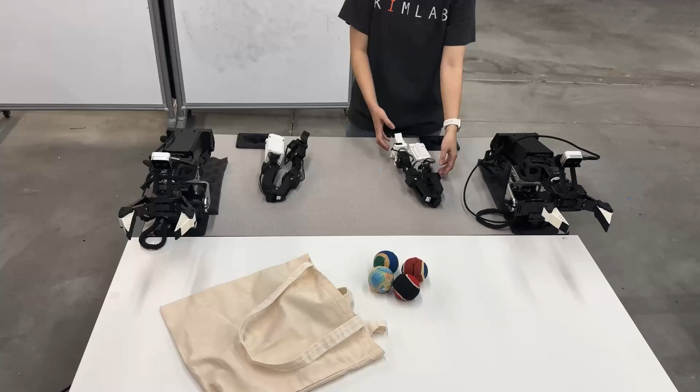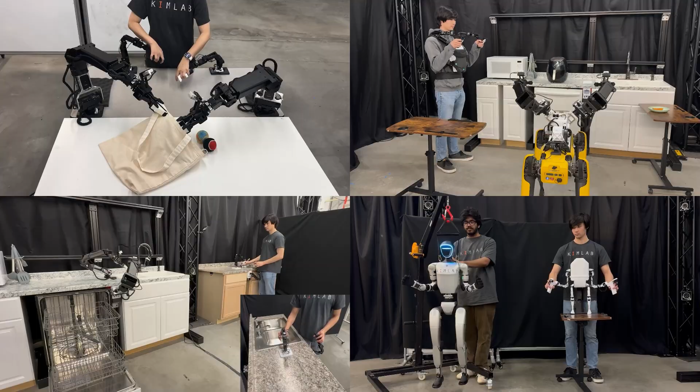We present PAPRLE, a modular ecosystem for robotic limbs. With PAPRLE, users can flexibly arrange diverse leader-follower setups and control various configurations through a unified teleoperation framework. By supporting a wide range of follower configurations and leader devices, PAPRLE provides a flexible and scalable solution for large-scale data collection.

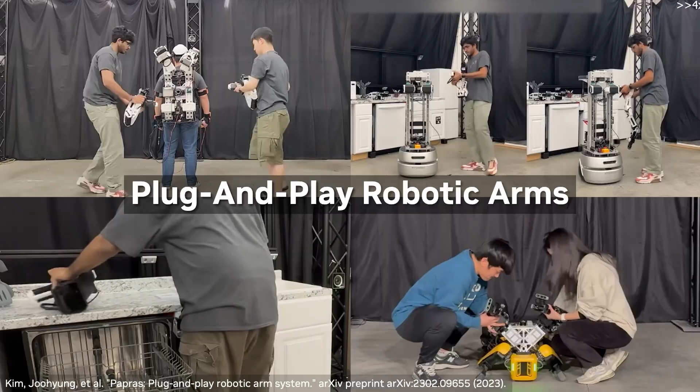In our prior work, we introduced PAPRAS, the plug-and-play robotic arm system. PAPRAS enables flexible hardware configurations by allowing robotic arms to be mounted in various places, enabling varied use cases.

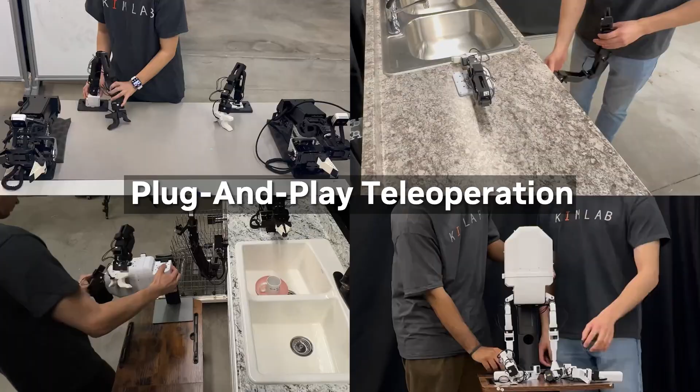Building on this plug-and-play concept, PAPRLE extends this idea to the teleoperation domain. We developed pluggable puppeteer devices that can be freely mounted to the system, as many as needed. This modular design allows users to teleoperate diverse multi-limb configurations of PAPRAS arms with ease.

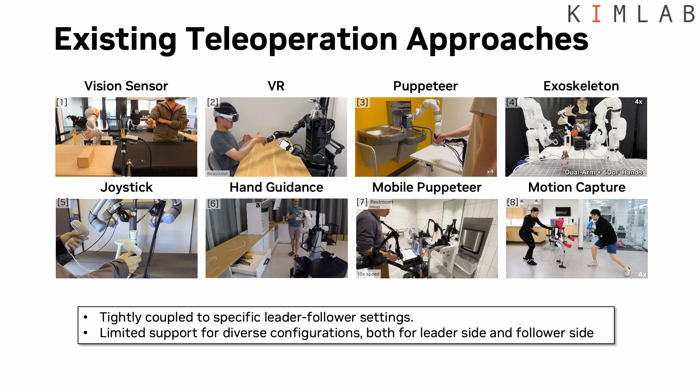As robot learning increasingly depends on large-scale datasets, teleoperation has become a critical tool for data collection. While many existing works have made significant progress in teleoperation, they are often tightly coupled to specific hardware setups. This makes it challenging to support broader diversity on both the leader and follower side.

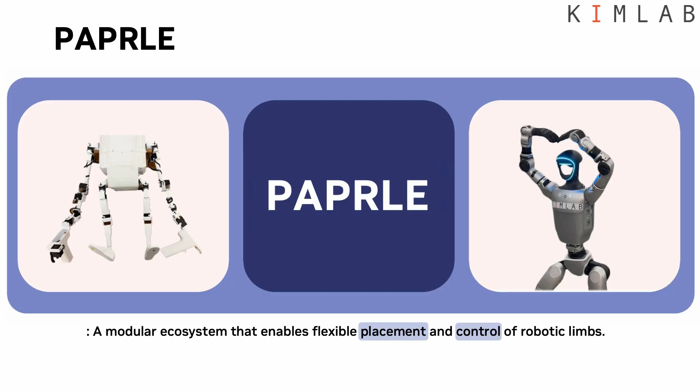In contrast, PAPRLE is not limited to specific leader devices or follower robots. Users can plug in the leader device of their choice and pair it with the desired follower robot.

Here are examples of diverse configurations using a pair of PAPRAS arms. They can be mounted on a table for tabletop tasks, on top of a counter or wall for extended workspace, or on a mobile platform for mobile manipulation tasks.

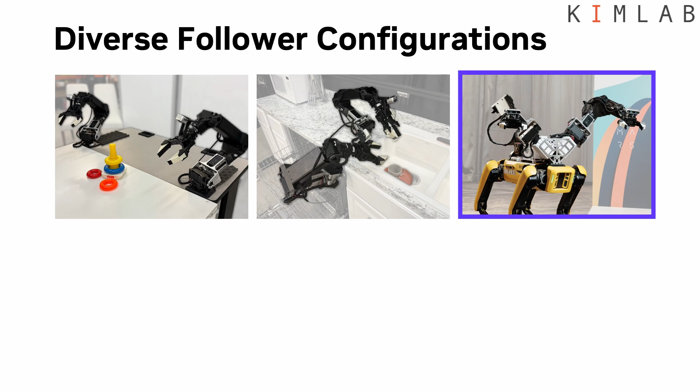Leader configurations for these setups can be easily arranged using our pluggable puppeteer devices, which can also be mounted in various positions to match the follower configuration.

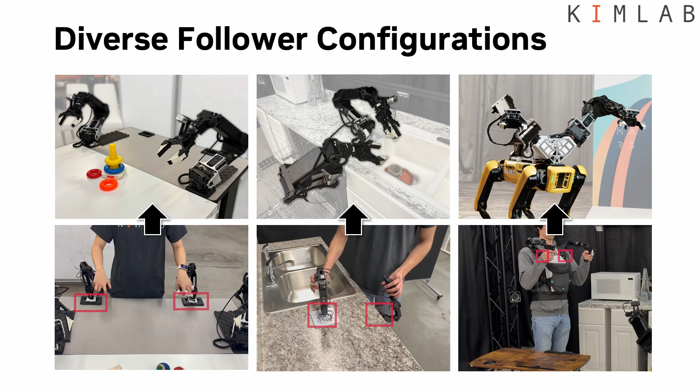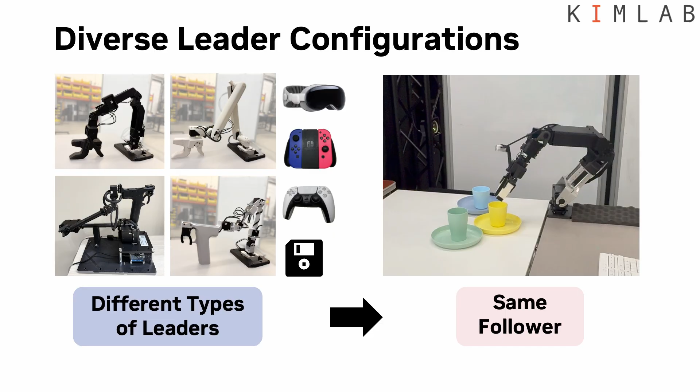This is the overview of the PAPRLE teleoperation system. The system is modularized with 4 modules, allowing users to plug and play leader and follower components as needed. PAPRLE supports both task space and joint space control, enabling teleoperation between heterogeneous setups.

For example, a puppeteer with a UR5-like structure can control a PAPRLE arm with a very different kinematic structure. The signals from the leader are translated into joint position commands and forwarded to the follower robot.

PAPRLE is compatible with a wide range of environments. For hardware, both ROS1 and ROS2 are supported, and for simulation, MuJoCo, IsaacGym, and Gazebo are supported.

For puppeteer devices, PAPRLE provides force feedback to the leader, enhancing user awareness even when the leader and the follower have different joint configurations.

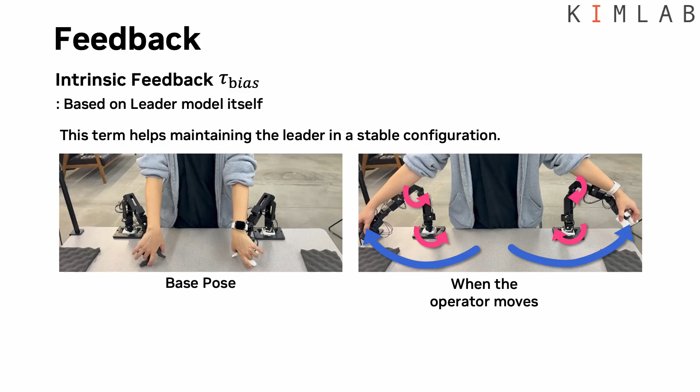PAPRLE implements 2 types of feedback: intrinsic feedback and extrinsic feedback. Intrinsic feedback is based on the leader model itself. It works as a bias term to maintain the puppeteer in a stable configuration, helping the operator move more freely.

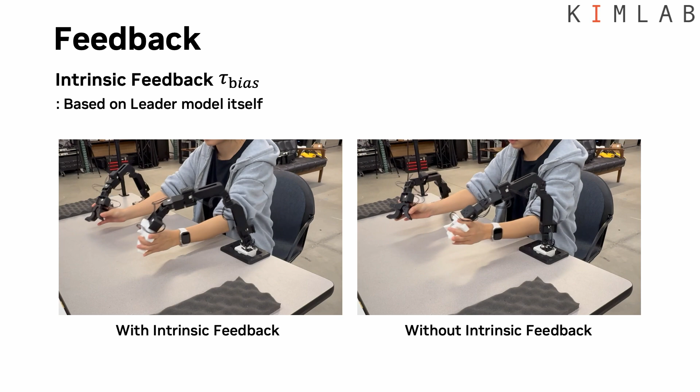Without intrinsic feedback, a multi-joint puppeteer device can easily collapse or collide with the environment. Such situations are highly undesirable during teleoperation, as they can disrupt control and potentially damage the hardware.

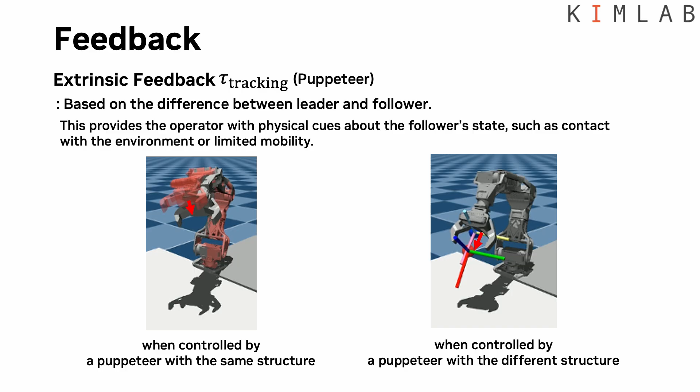Extrinsic feedback is generated from the discrepancy between the leader's command and the follower's actual state. It provides the operator with physical cues that reflect collisions, contact forces, or kinematic constraints.

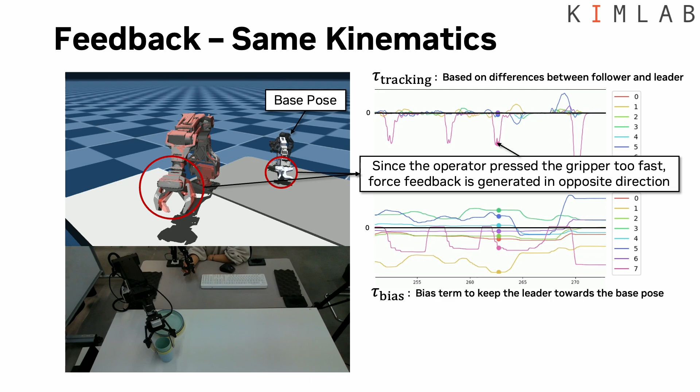This is an example of force feedback when they share the same kinematics. Here, the operator pressed the gripper too fast. The force feedback is generated in opposite directions.

Then, the operator moved too fast, so the force feedback is generated to push each joint of the puppeteer towards the follower pose.

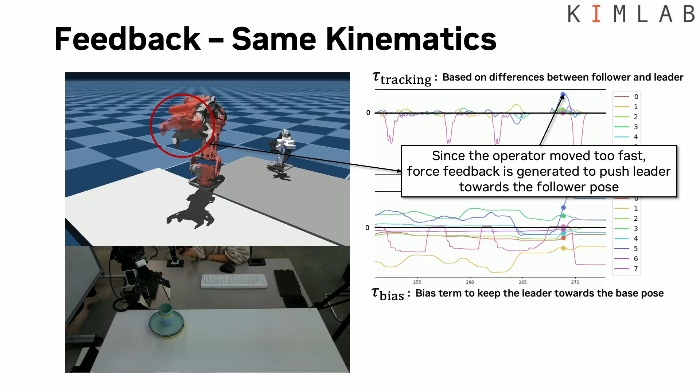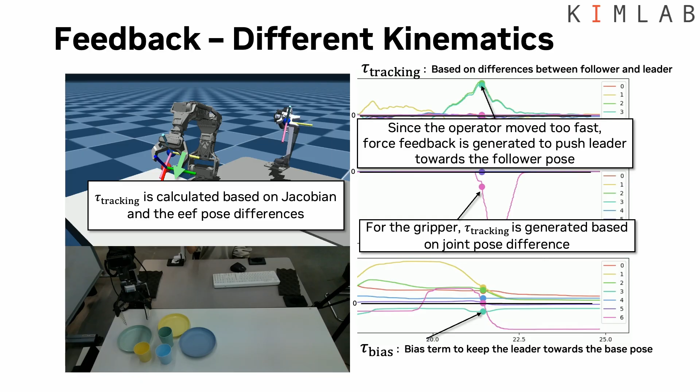Using the Jacobian matrix, the force feedback for each joint can be calculated. For the gripper, extrinsic feedback is generated based on the joint position differences.

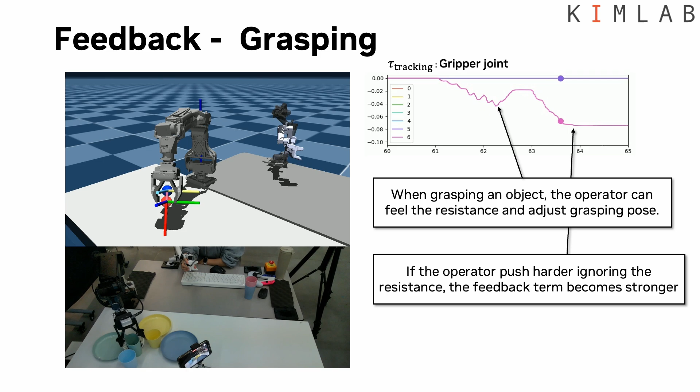Here is an example of gripper-level feedback. As the follower robot grasps an object, the discrepancy between the commanded gripper pose and the actual follower gripper pose naturally happens. The operator can feel the resistance. If they push harder, the feedback force increases, guiding them towards safer grasps.

Now we show demonstrations of PAPRLE across diverse follower configurations.

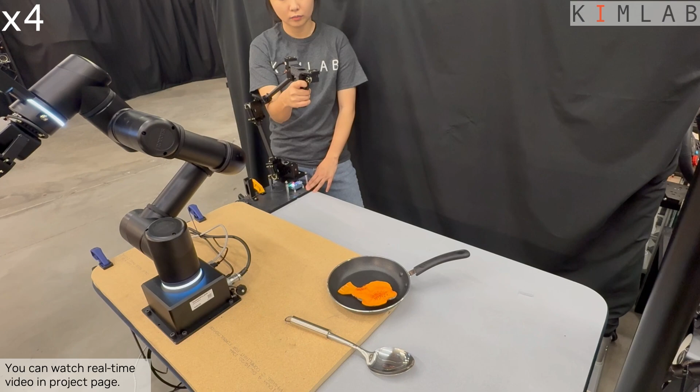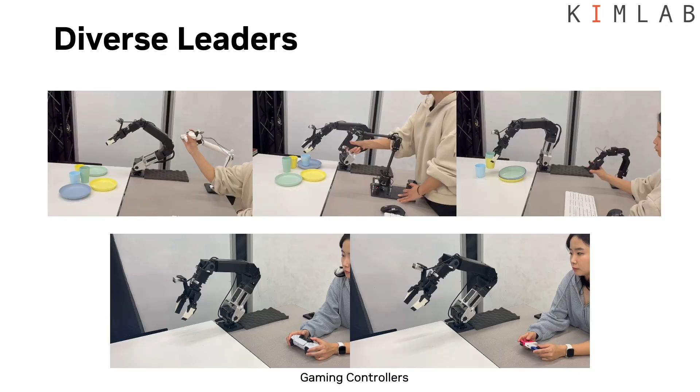Here, these are examples of controlling the same follower robot using different leader devices, demonstrating the versatility of the PAPRLE interface. PAPRLE also supports streaming pre-collected data to the follower robot.

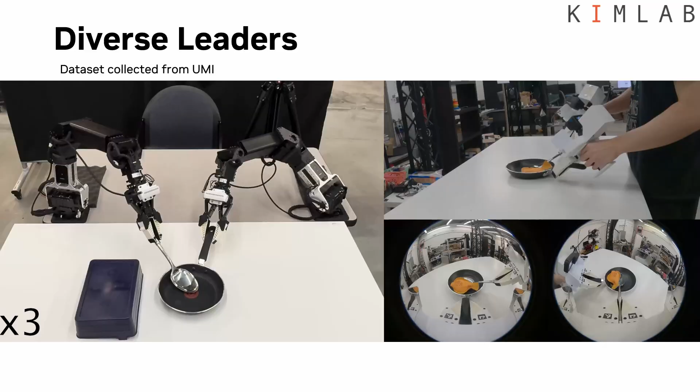In this video, the PAPRLE arms reproduce the motion collected from UMI, Universal Manipulation Interfaces. Using PAPRLE, we can efficiently collect demonstration data for training robot learning policies across varied tasks and platforms.

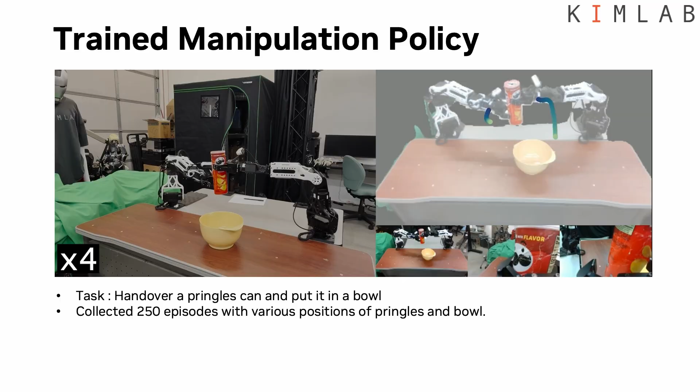These are example videos demonstrating the dataset collection process. This slide shows an example episode of the collected dataset. We trained a manipulation policy using data collected with PAPRLE. The results show that PAPRLE provides a reliable foundation for data collection in real-world settings.